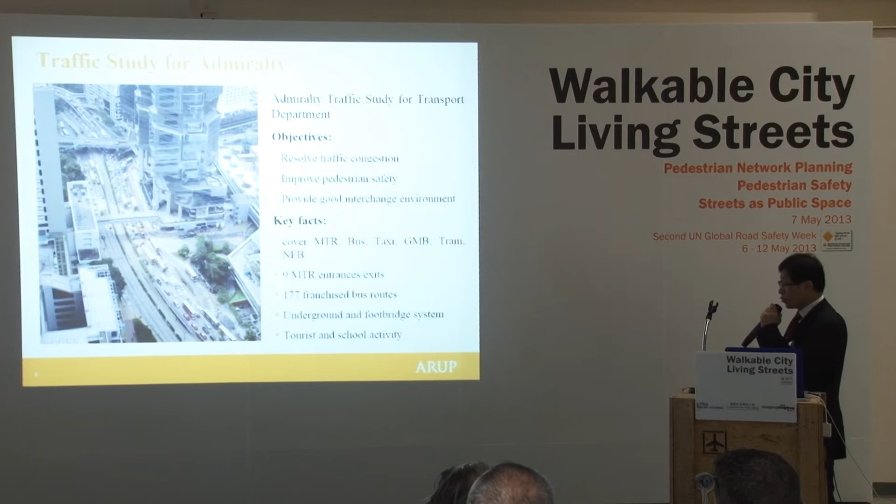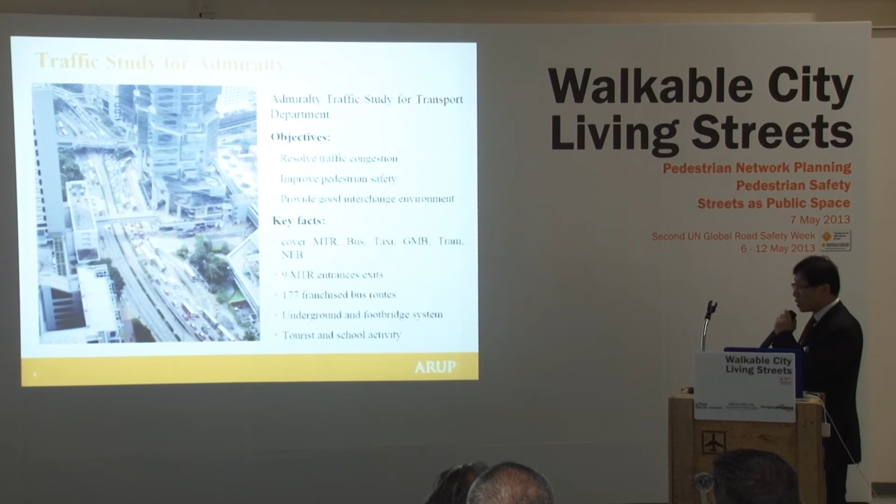So it covers quite a wide range of stakeholders on the street, including all kinds of vehicles and public transport. There are 9 MTR entrances and exits, 177 franchise bus routes, underground and footbridge systems, if you know Admiralty well. And there will also be tourists going to Ocean Park and a lot of school activities.

So there are some key findings. I'm not going to repeat it all, but we're talking about a large number of people—almost 20,000 during the AM morning peak. We're talking about almost 200 franchise bus routes, with 680 buses, and over 8,300 boardings and alightings during peak hours.

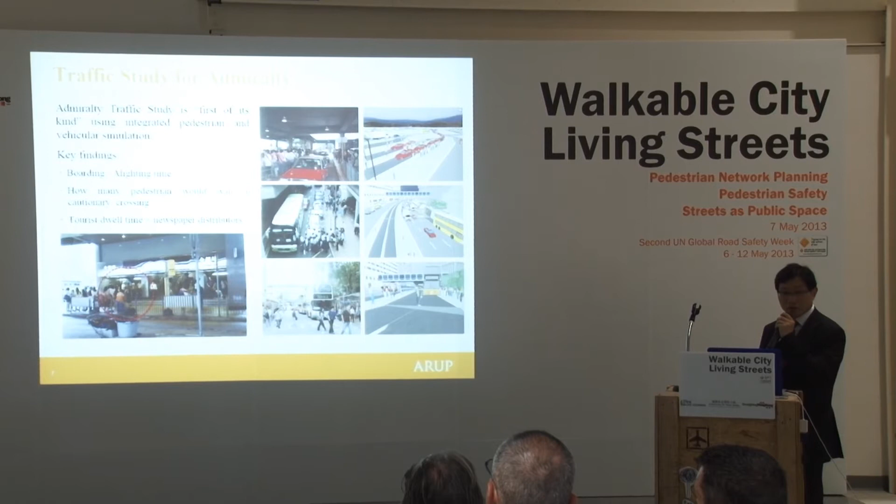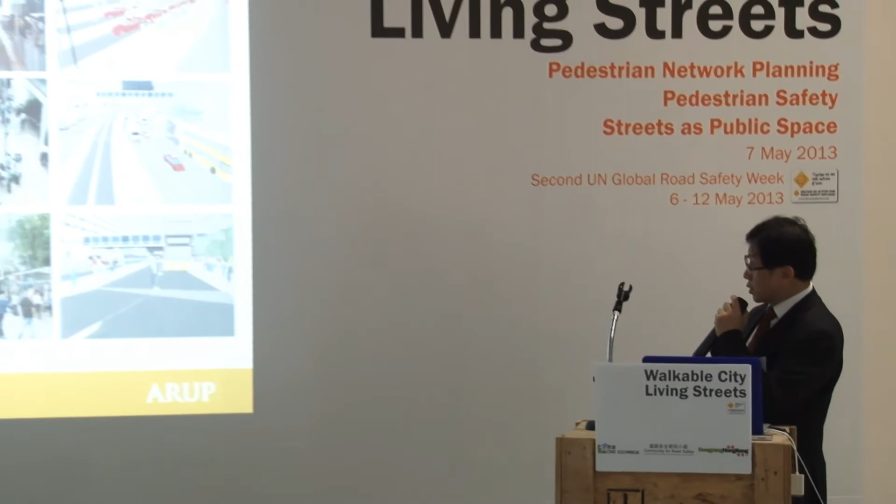And the Admiralty traffic study is really the first kind of work where we integrated pedestrian and vehicular simulation. We have done many traffic studies doing simulation trying to replicate the behavior of vehicles. We have also separately done some pedestrian simulation models to replicate pedestrian behavior. But this really is the first assignment where we had to integrate pedestrian and vehicle simulation, because people might have to queue at the taxi rank, get on and off the bus, cross the street in front of the bus stops, and there's an interaction between vehicles and pedestrians.

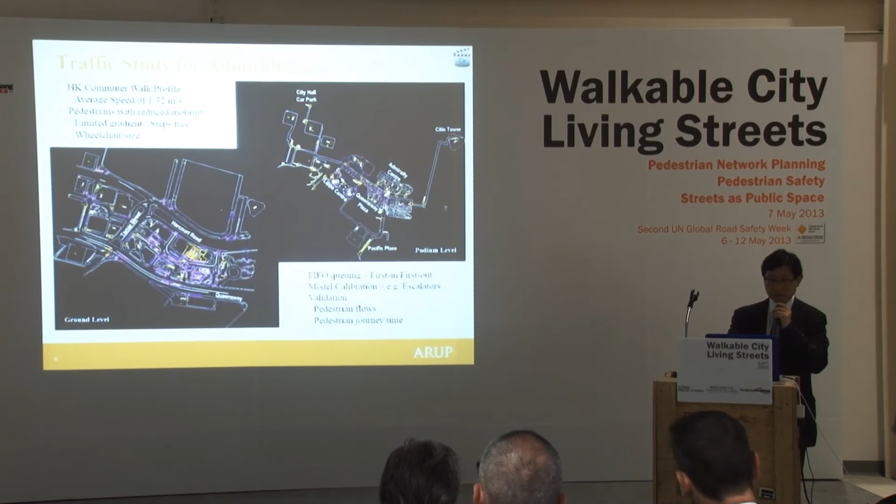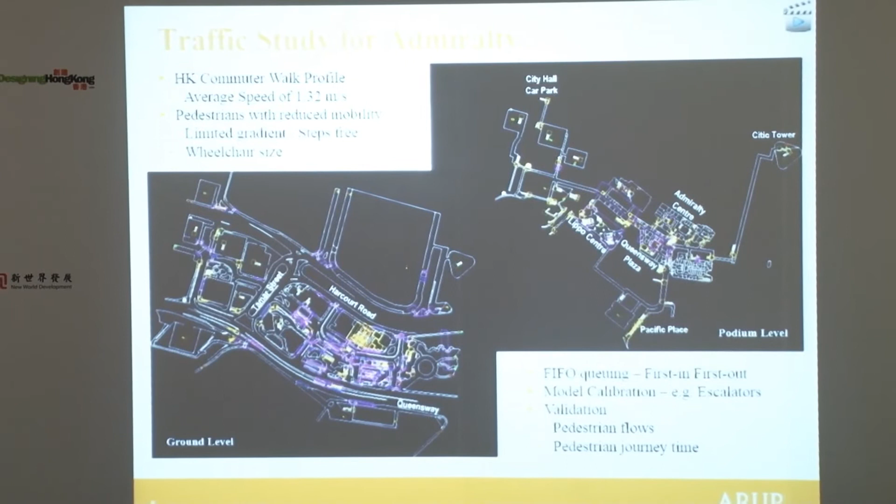And I'll show you some video about what we have done. So this one, we try to understand the commuters getting out from the Admiralty station.

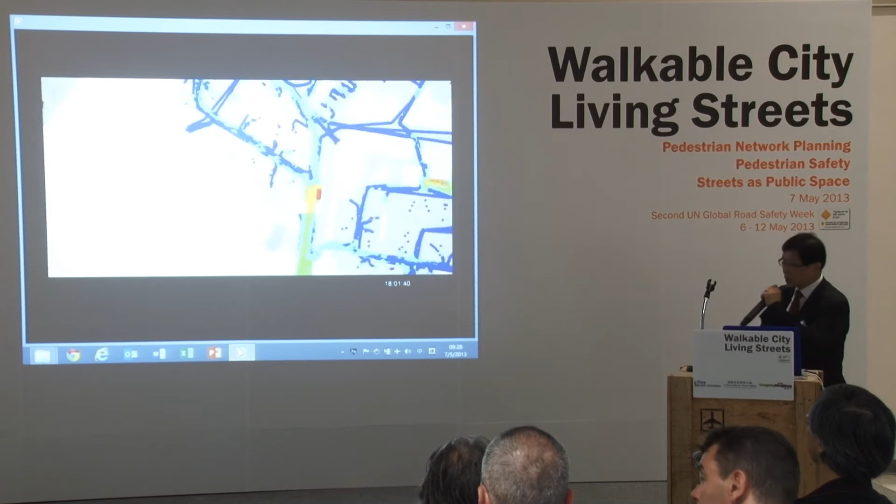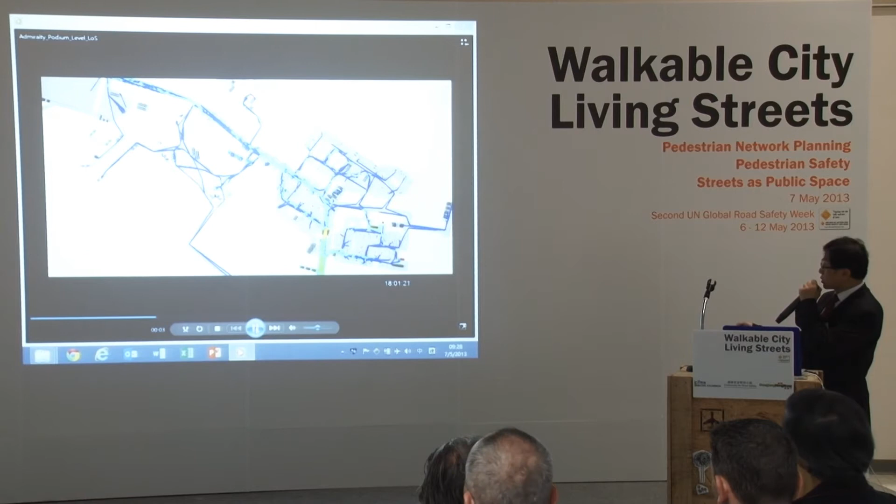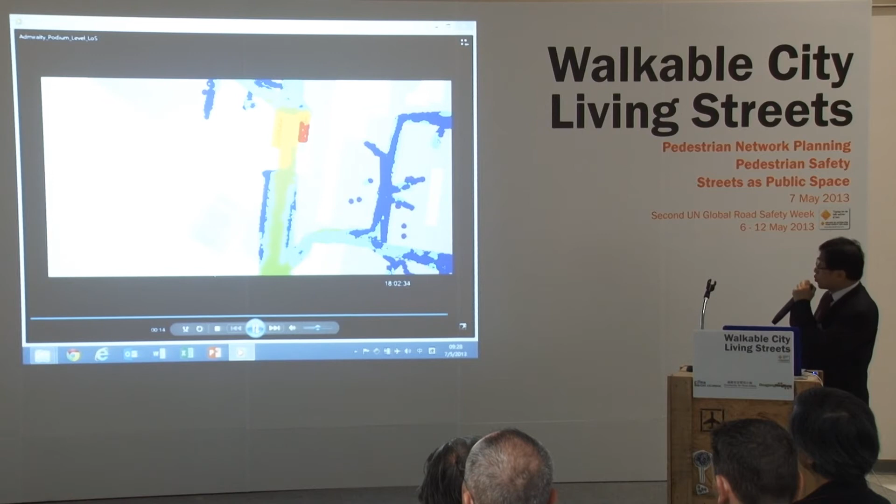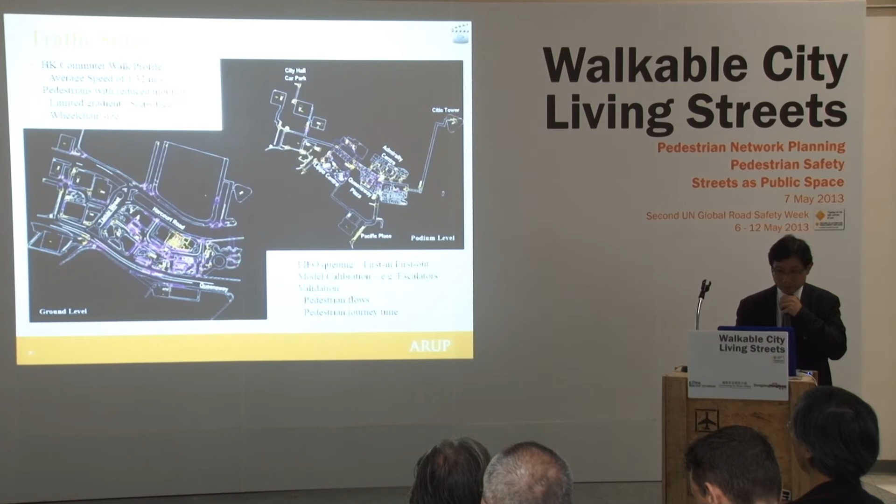We found that in Hong Kong it's not just pedestrians walking around, but also activities like people boarding and alighting at the bus stop, and also free delivery of these new free newspapers. This also affects people's behavior - some try to get the newspaper and others try to avoid it. So the simulation or prediction of pedestrian behavior is somewhat difficult.

We have also looked at how to improve mobility, not just for vehicles but also for pedestrians, to make sure that the conflict between pedestrians and traffic is minimized.

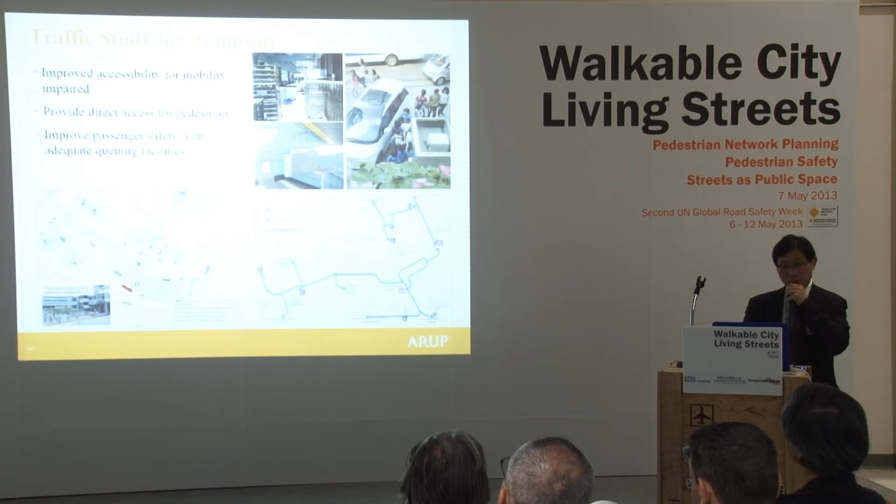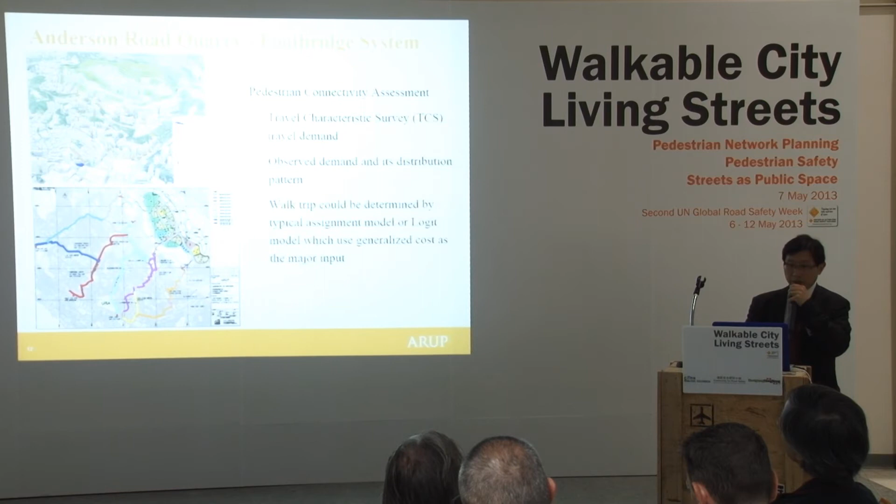We also have other studies like the Anderson Road Quarry. There's a development that will be housing quite a lot of residents there. We have also looked at how to provide connections for the pedestrians or residents to come down to the Kwun Tong area, so there will be a lot of surveys and studies.

As I mentioned, there will be more challenging work - at the Admiralty Station there will be 4 MTR lines interchanging there, and we also have some tools to help provide for this.

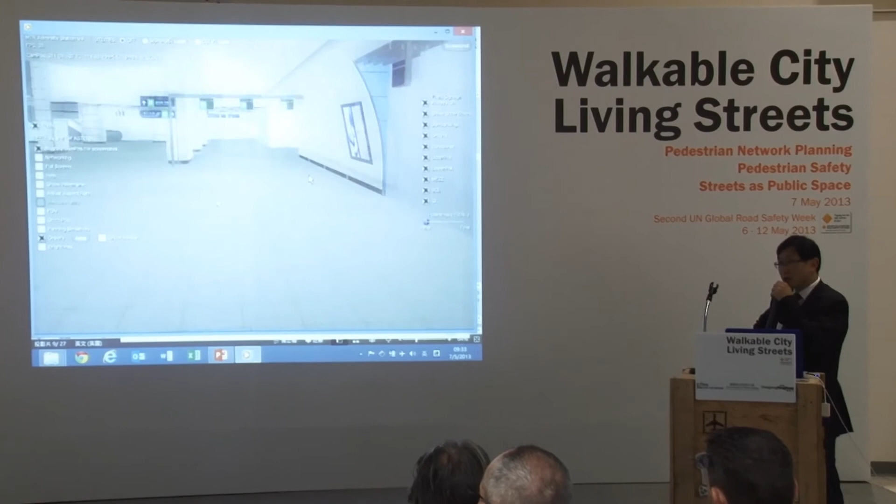When we try to plan the internal wayfinding for people, we have these tools to show the design. We ask some of our colleagues who don't know about the layout and weren't working on this project to walk using these tools and behave as a pedestrian, especially a first-time pedestrian coming to this interchange, to see whether they can find their way interchanging from one line to another. If the directory isn't clear enough or they hesitate, that means somewhere we can put better or clearer signage to let people move around effectively and reduce hesitation or conflicts.

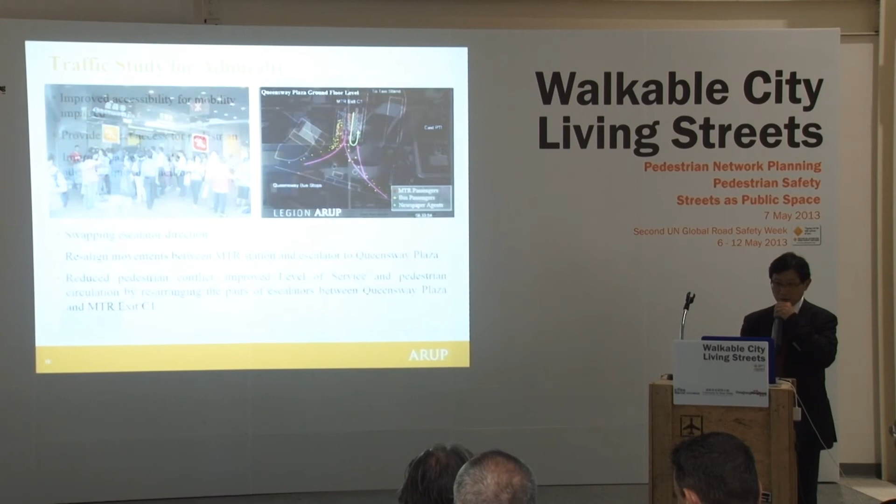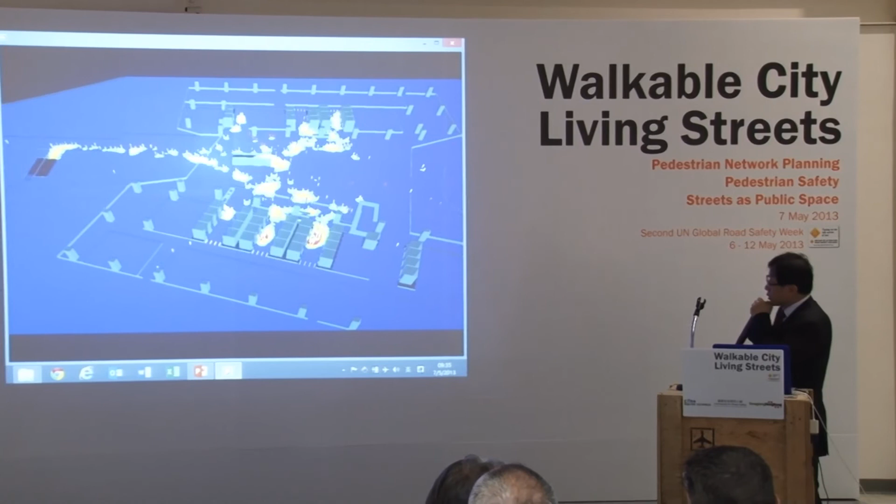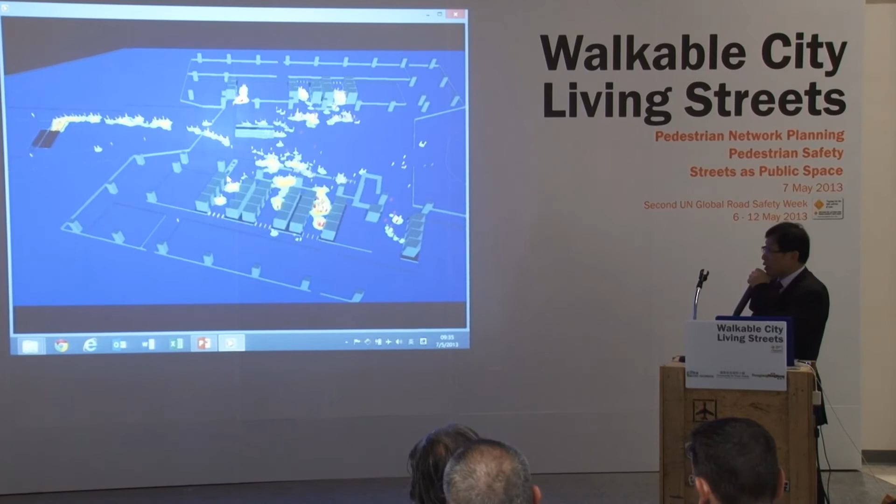It's a big corporation in Shenzhen where they have a headquarters, and the assignment given to us was to design and look at the lobby. It's estimated that about 10,000 of their workers or staff will be coming in during 1 hour of peak hours by coaches, and this is where they come out from the ground floor and go up to the lobby level and then into the lift lobby.

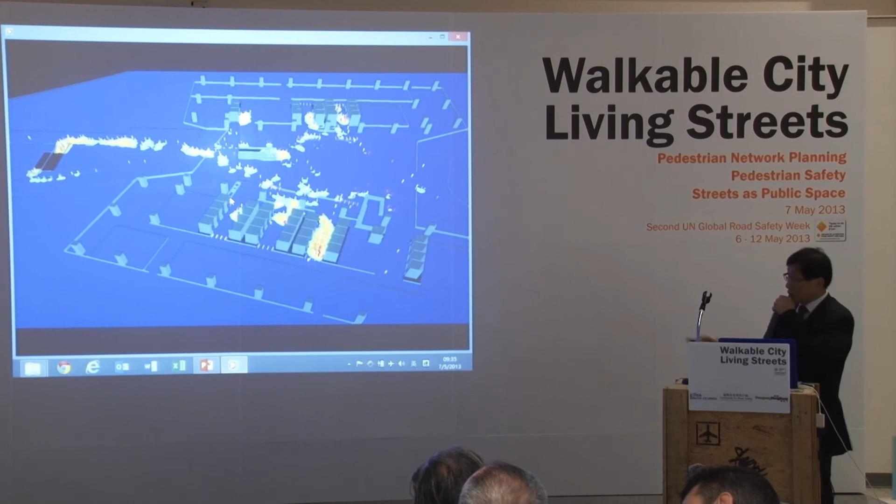We can identify whether there will be enough space for people and where the congested areas will be, and try to work with the architects to improve the layout of the building, because now we're talking about a large number of people.

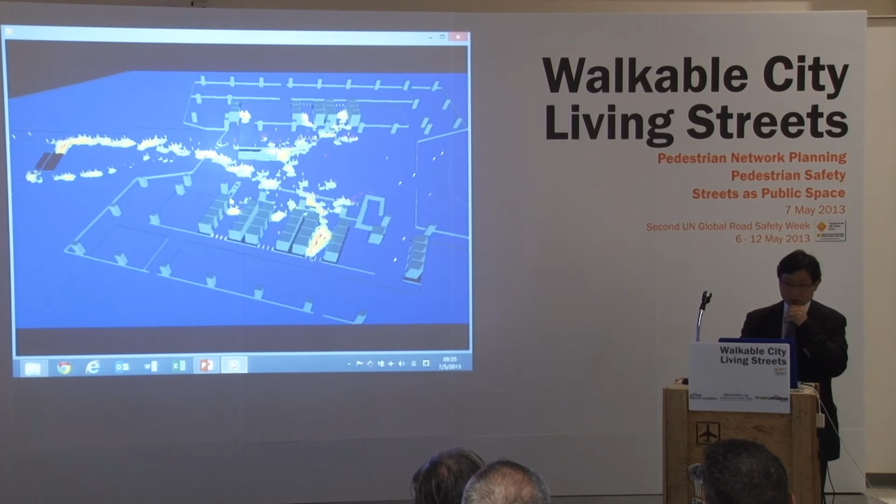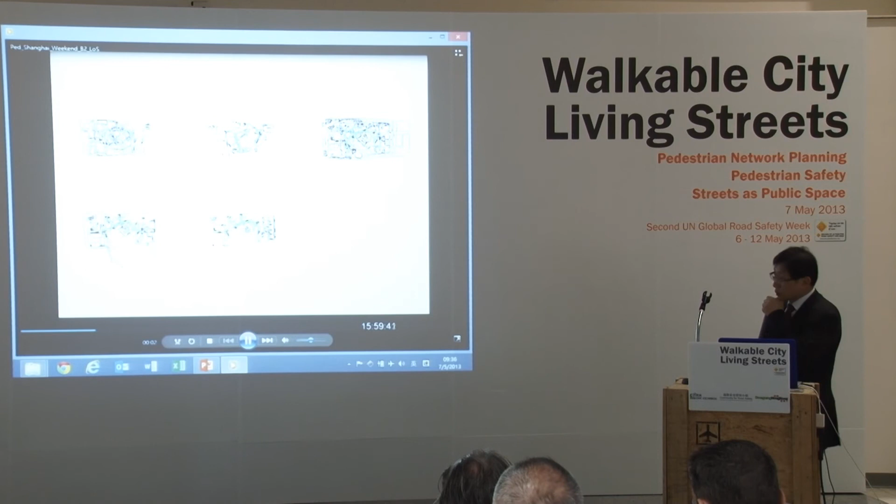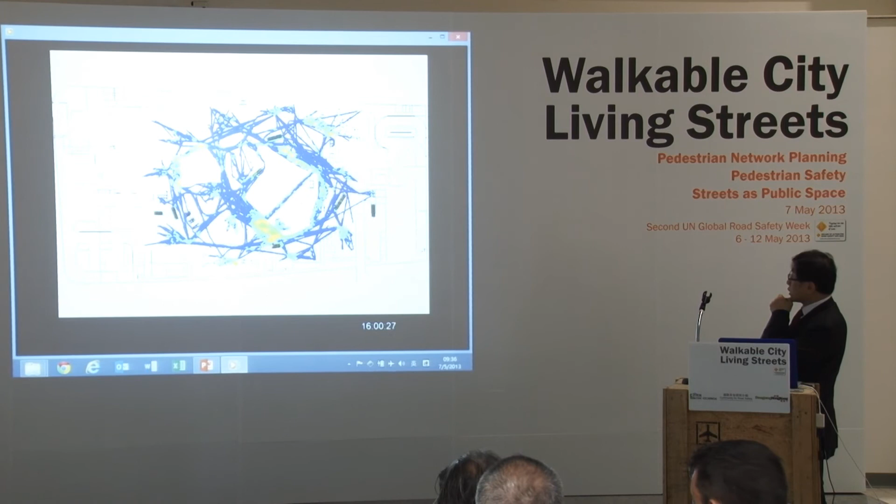And there's another project we have in Shanghai, where we try to look at the customers walking around in their shopping mall. Because this shopping mall also includes the metro station, we looked at whether the entrance is good enough and where the congested areas would be and how people move around.

We identified that there would be some congestion in particular areas, and then we worked with the architects again to improve the layout, like the location of the escalator or the entrance, and even identified a wall that acted as a bottleneck.

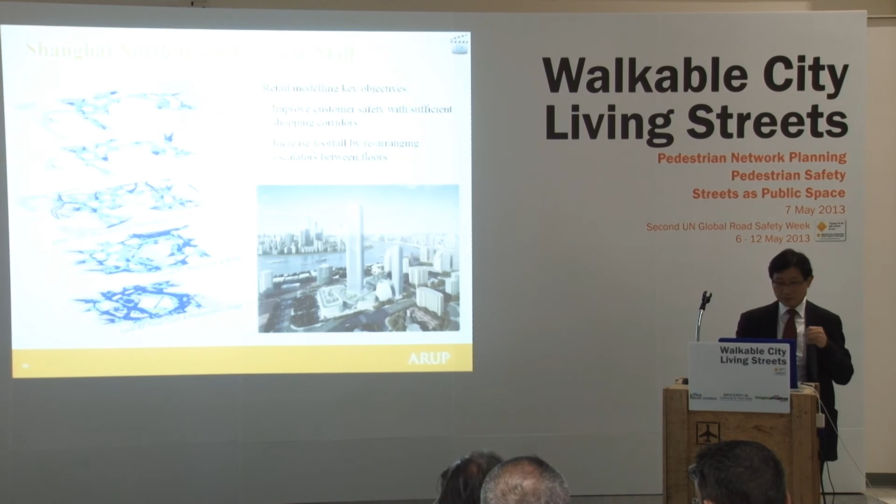There's another case study we're working on now with the Hong Kong Jockey Club, looking at crowd management during horse racing. We try to look into different situations or events and look at the magnitude of the people going into the race course.

We have also done this Tsim Sha Tsui area pedestrian improvement study, and as a result you can see that we proposed widening the Canton Road pavement and the Nathan Road pavement, trying to get back the space that was lost to vehicles before, and now giving it back to pedestrians.

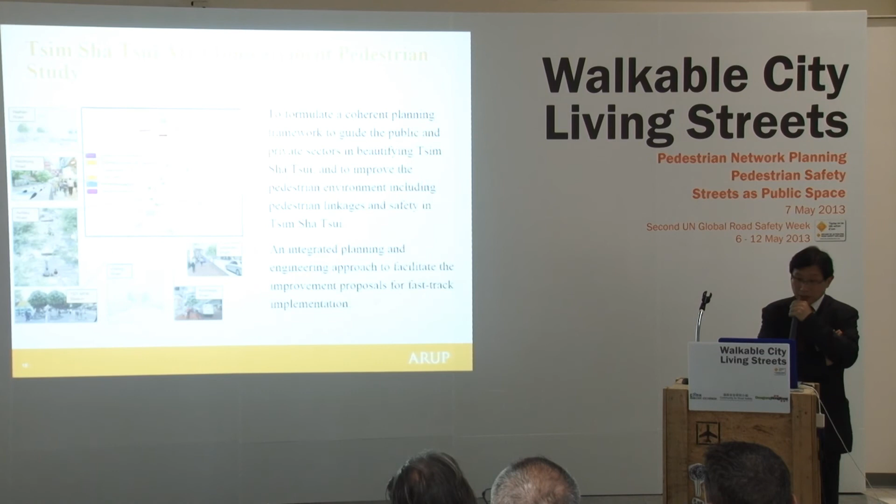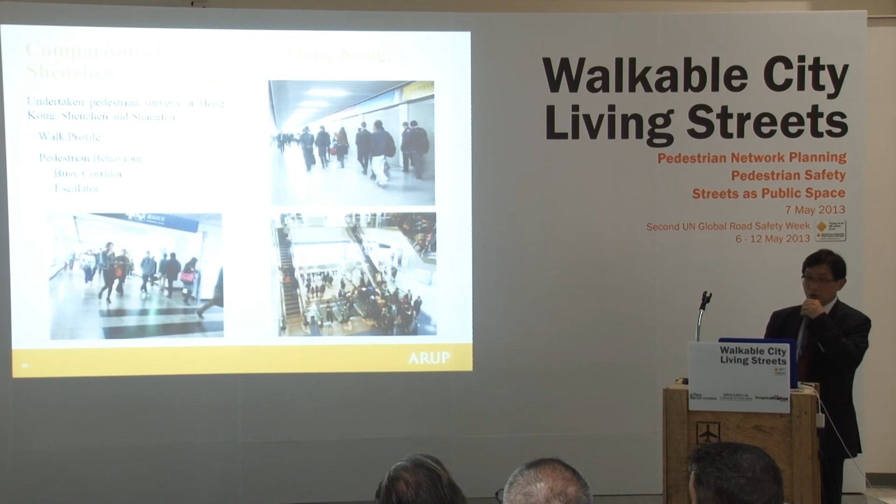This is a recent research project in our company. We try to look at whether there are different behaviors of people in Shenzhen, Shanghai, and Hong Kong, looking at walking speeds and things like that. This is some of the comparisons.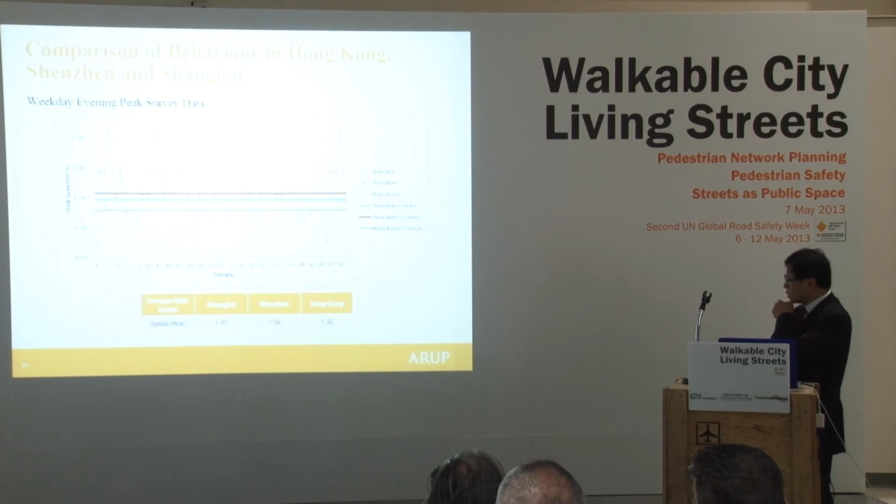I then asked them to look into the situation—is it because Hong Kong has a more aging population now, so we walk slower? The feedback, after they checked the video, was that one issue is the selection of the place to get these statistics isn't really 100% comparable, because the place we chose is busier, meaning you're not free to maneuver around, so that's why you walk slower—there are more people in the situation in Hong Kong.

So sometimes we cannot be fooled by the numbers; we have to look into the reasons. This shows one of the reasons: we are not slow, we're still fast, but because we are denser and busier, that's why we comparatively walk slower. But that means we need to get more space, especially from the cars. That could be one of the conclusions.

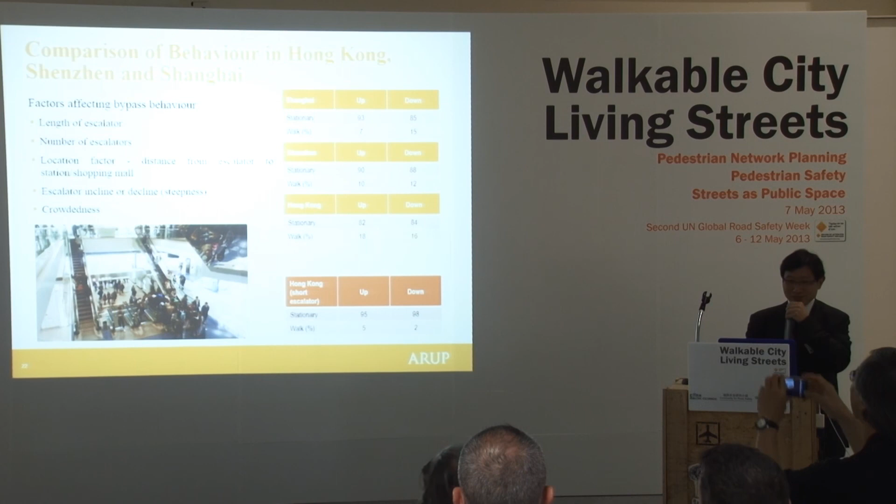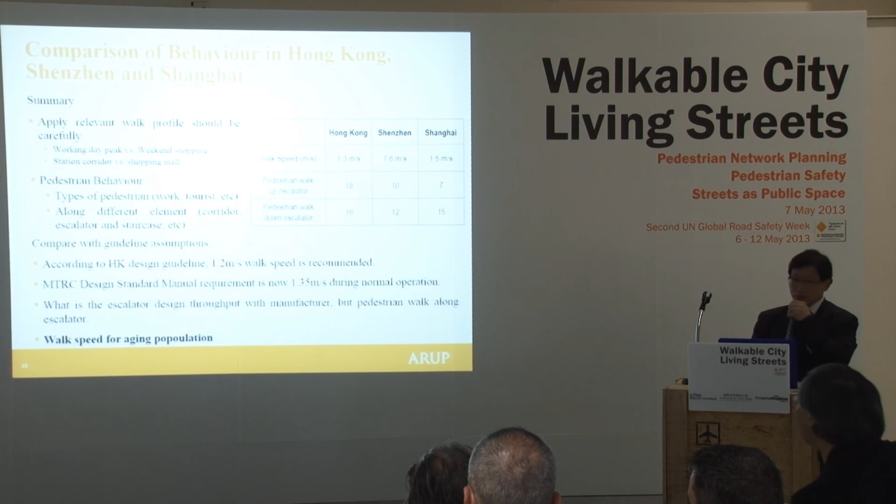There's also some numbers we try to look into, but this shows quite interesting research, and in fact I am applying for further funds from our company to do further research on that.

So what's next? I've shown you all kinds of case studies we have done. One very important thing—and I've shown it could be misleading—is that on-site observation and understanding of behavior are very important, are key. And simple arrangements, sometimes not expensive, can resolve problems.

Because pedestrian movement is not linear, it's dynamic, video survey isn't just often helpful but, as I would say, vital. It's not just based on boring numbers, but it's very important to look into the behavior of people in different situations.

The way forward, as I said, is that we would like to enrich the pedestrian database for other major cities within East Asia, and we welcome any collaborations to work on this. For different pedestrian types, their behavior is different for sure. There's something we need to build up to come up with effective pedestrian planning. I think that's the conclusion of my speech this morning.